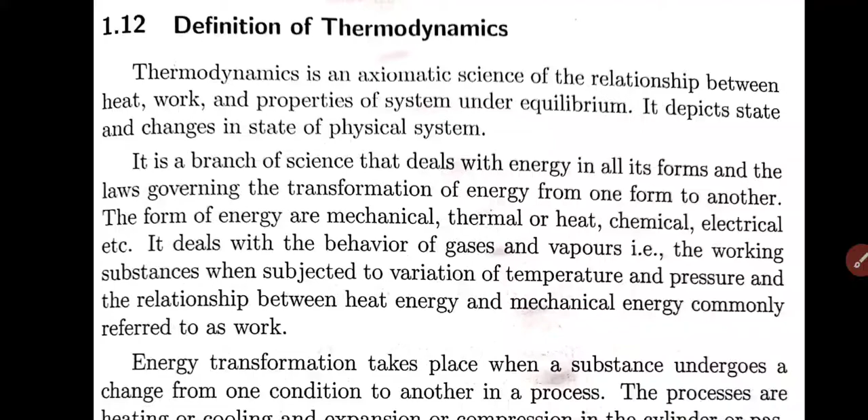Hello students. Now we shall look at thermodynamics. Basically it's a science of relationship between heat and work.

We use vehicles for transport like small scooty, bike, car, truck, train, aeroplane. We use power generated by thermal power plants, nuclear power plants. We use gas turbines for power generation. We use air conditioning system. We use refrigeration systems. In all these systems, there is interaction between heat and work.

Like in transport vehicles, we use liquid fuel, like petrol and diesel, which is burnt, and then the heat energy is converted into work. Similarly, in the case of refrigeration and air conditioning, we use electricity to run a motor, and that transfers the heat. So either heat is converted to work or work is converted to heat. These systems, when we discuss, we want to discuss the performance of the systems also.

You are all aware that whatever oil, gas, coal we have got in the earth crust is very finite in nature. It is fast depleting, and it is told that another 40-50 years oil will not be there, another 100 years coal will not be there. So what is the source of energy for the future generations? One thing. Second aspect is the environmental pollution.

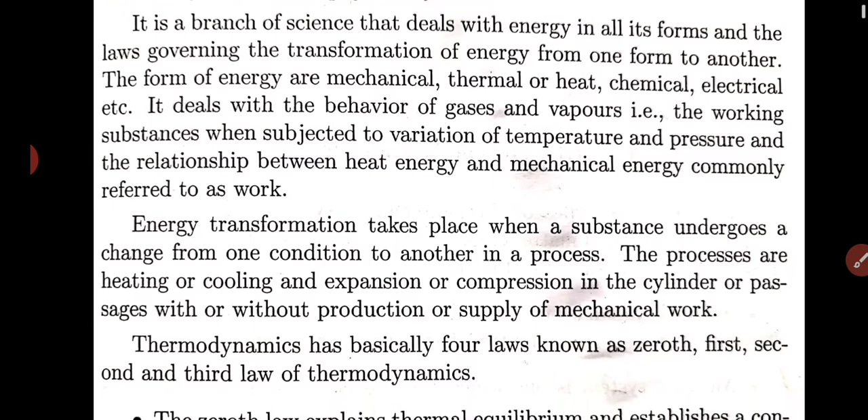So it deals with all kinds of energy like mechanical, thermal, heat, chemical, electrical, etc. And it also deals with the behavior of gases and vapors, especially in a steam power plant. In a steam power plant, you are using steam. Like your Kaiga nuclear power plant. What happens there? Nuclear reaction is there. Heat is produced. That heat is carried away by heavy water.

Then that transfers it to the normal water. Normal water gets converted into steam, superheated steam. That is expanded in a turbine, which is coupled to a generator, and electricity is produced. So we have to study how this steam is changing phases. These all relationships we will study in thermodynamics. And this mechanical energy component we call it as work, whether rotation of shaft or movement of object from one place to another place.

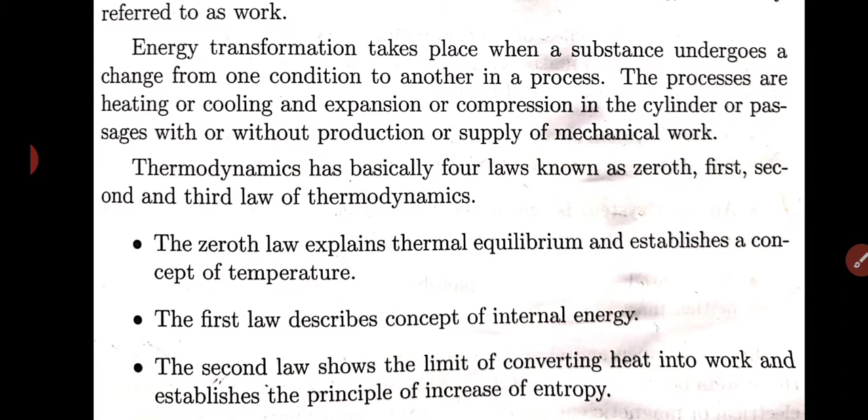So thermodynamics has basically 4 laws: first law, second law, and third law. And they found out one more law, but that law is the basic law, which talks about temperature. So they called it as zeroth law. The zeroth law explains thermal equilibrium and established the concept of temperature. Because of zeroth law, we have come out with the concept of temperature.

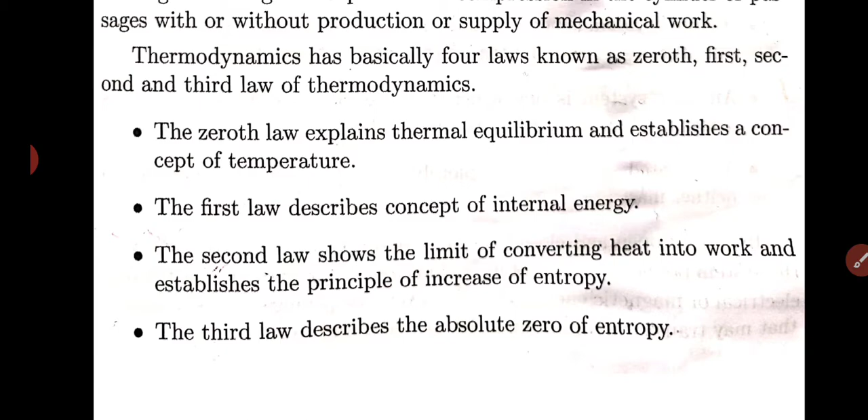Thermodynamics is a 300 years back story. So please try to understand. That time they defined the concept of temperature. As of today, you are aware because they use an IR gun to take the temperature. But just imagine those years. So first they had to define the concept of temperature.

Then the first law of thermodynamics, you know that energy can neither be created nor destroyed. So this gives the concept of internal energy. And the second law shows the limit of converting heat to work and work to heat also, and thus it establishes the principle of increase in entropy. So this law talks about entropy.

So whatever heat we supply to the bike engine, suppose 1 liter of petrol is burnt, only 1/3 is used for power generation, 2/3 goes as cooling heat or exhaust heat. So it is not that 100% of the heat energy supplied to the engine gets converted into work. Only 30 to 40% gets converted, but the rest 60% is lost in the form of heat, engine cooling water or cooling air.

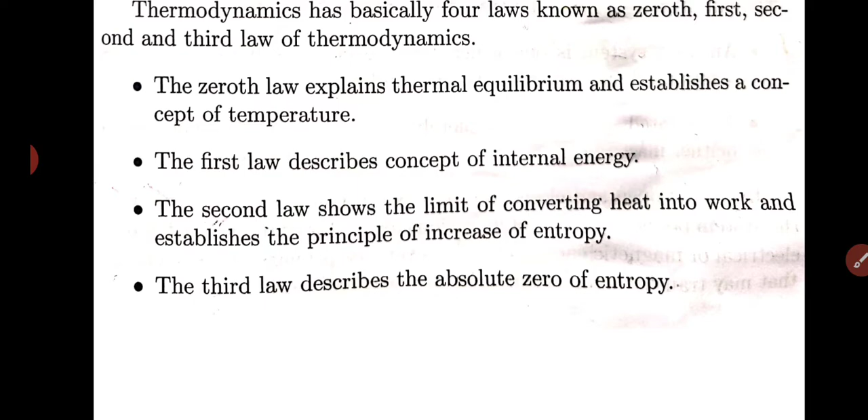And the third law describes the absolute zero. You should know what is the lowest temperature we can reach. The lowest temperature we can reach is minus 273 degrees centigrade, also known as 0 Kelvin. At that temperature the entropy, the disorderliness in any system, is 0. So these are the 4 laws.

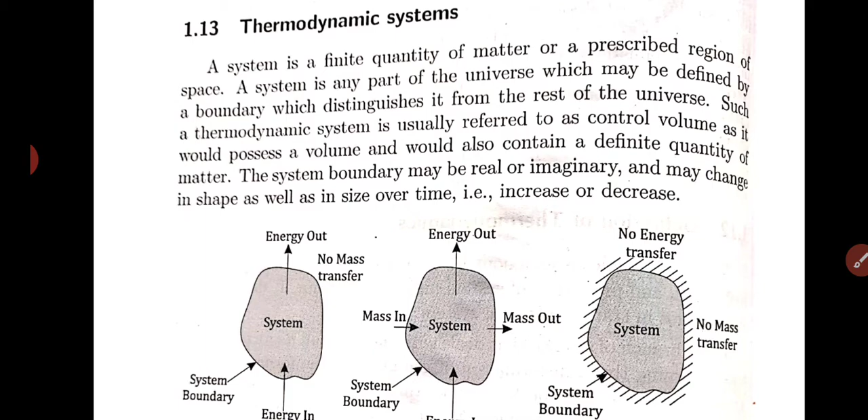Now, to study thermodynamics, we first have to study a system. What is a system? Take any system, like your bike engine. If I take a bike engine, what happens in it? I am supplying petrol, I am supplying air, and the exhaust gases are going out of the engine, right? And the engine is also doing work.

The engine is taking heat energy inside and throwing out heat energy as well as doing work, and there is a heat interaction between the engine and the surroundings. So if I take the engine as a system, you can see energy is coming in and energy is going out. And there is a system boundary like the cylinder wall. If I take that as the system boundary, then that becomes the boundary.

So there is transfer of energy inside and outside, and there is transfer of mass inside and outside, that is, fuel coming in and exhaust going out. So this becomes an open system. In an open system, energy, that is heat and work, and mass, like fuel and exhaust gases, go in and out. So this is known as the open system.

Now take another system, like your pressure cooker, where you have put some rice for boiling. What happens here? You are supplying heat energy to the pressure cooker, and some heat is going out through radiation from the pressure cooker because it is at high temperature. Any body above 0 Kelvin will always radiate. So it is emitting radiation; energy is going out in the form of heat.

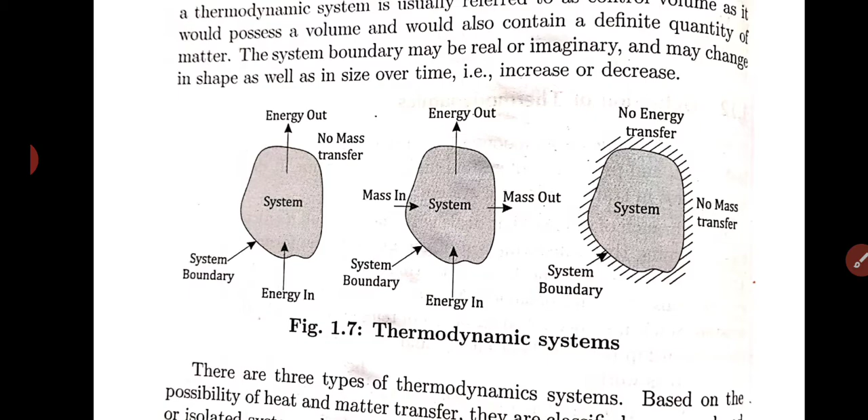Like the pressure cooker. And the last is the isolated system, where neither heat exchange nor mass transfer is allowed between the system and surroundings. So here the only differentiating factor is mass. You should remember: mass transfer is not allowed.

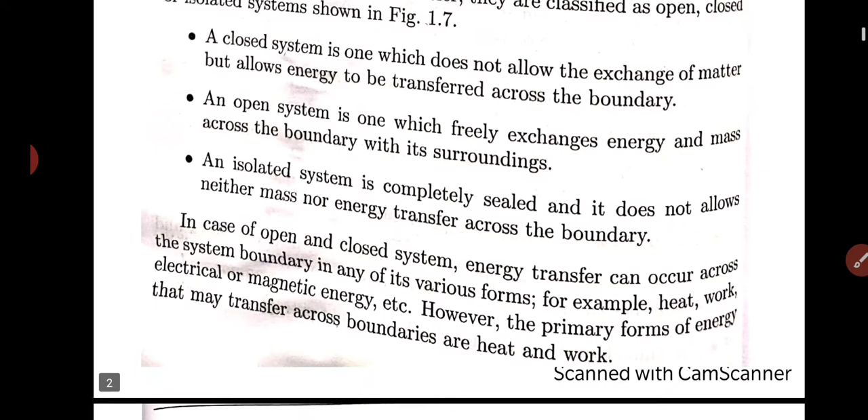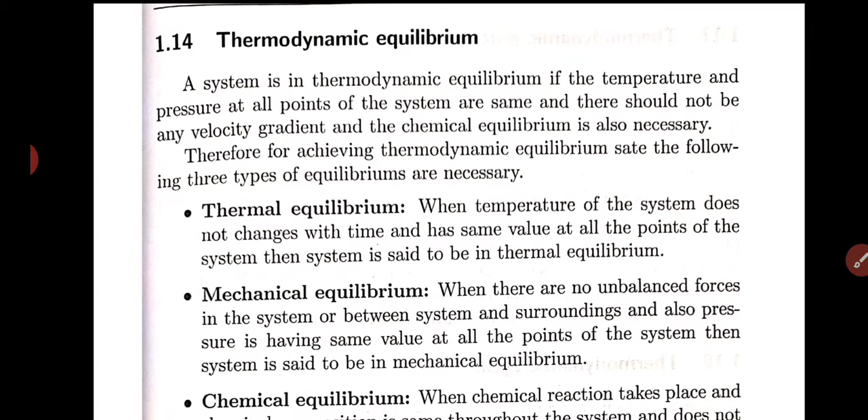Now let us come to a concept called thermodynamic equilibrium. There is something called equilibrium, and there are different types: thermal equilibrium, mechanical equilibrium, chemical equilibrium, and lastly thermodynamic equilibrium.

You have seen the seesaw children play on, sitting on either side. When they start, it oscillates, then after some time it comes to a standstill. That means there are no unbalanced forces between the system and surroundings, and this we call mechanical equilibrium. So mechanical equilibrium means there are no unbalanced forces between the system and the surroundings.

Now let's come to thermal equilibrium. I take a hot cup of coffee, keep it on my table, leave it there for about 1 hour, and then come back. What happens? The hot coffee I had kept at maybe 70-80 degrees centigrade will be at room temperature, say 35 degrees centigrade, after 1 hour. So what has happened? Whatever heat was in the coffee has been exchanged with the ambient air and it cooled down.

So now they are in thermal equilibrium. That is, the temperature of the system does not change with time, and has the same value at all points. It needs to be in thermal equilibrium. Initially it was not in thermal equilibrium. When I kept the hot coffee, the coffee was hot and the ambient condition was 35 only. But over a period of time, the coffee has become 35 and the ambient air temperature has become 35. So now both of them are 35. So the temperature is same, it does not change, and now the system and the surrounding are said to be in thermal equilibrium.

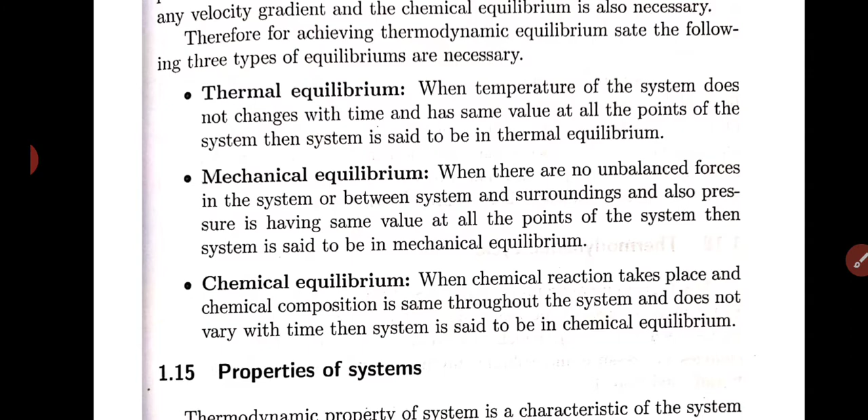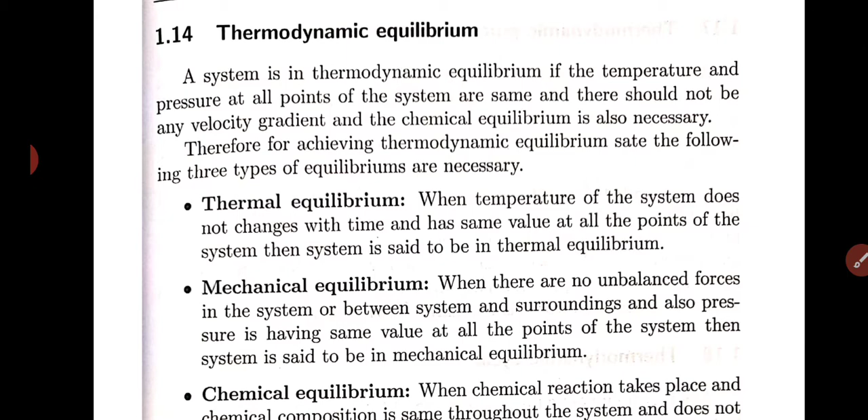Okay, now comes chemical equilibrium. In chemical equilibrium, initially there may be some chemical reactions, but after some time no chemical reaction takes place and the chemical composition is same throughout. Then I will call it chemical equilibrium. Now what is thermodynamic equilibrium? When a system and surroundings are in thermal equilibrium, mechanical equilibrium as well as chemical equilibrium, then we say that the system and the surroundings are in thermodynamic equilibrium. Okay.

Now we will discuss the properties of the system. What are the properties? Volume is a property, mass is a property, temperature is a property, density is a property. We define the system by these properties. So a property of a system is a characteristic of a system which depends on its state, but not upon how the state is reached. The property of a system depends upon the state.

Now I am talking about a hot cup of coffee. It is hot at some 80 degrees centigrade. So how am I going to define it? 100 ml of coffee is there at 80 degrees centigrade, so I am defining the volume. I am defining it by mass also: 100 grams of coffee at 80 degrees centigrade. So these are the properties of the system, if I take a cup of coffee as a system. Now there are two types of properties: one is the intensive property and second is the extensive property.

Please understand, an intensive property is any property that does not depend on the mass of the system. Suppose I take that cup of coffee and I share it with my friend, I make it half. So what happens? Does the temperature change? No, both are at the same temperature. Does the pressure of the coffee change? No, they are at same pressure. Does the density change? No, the same density is there. So temperature, pressure and density we call intensive properties.

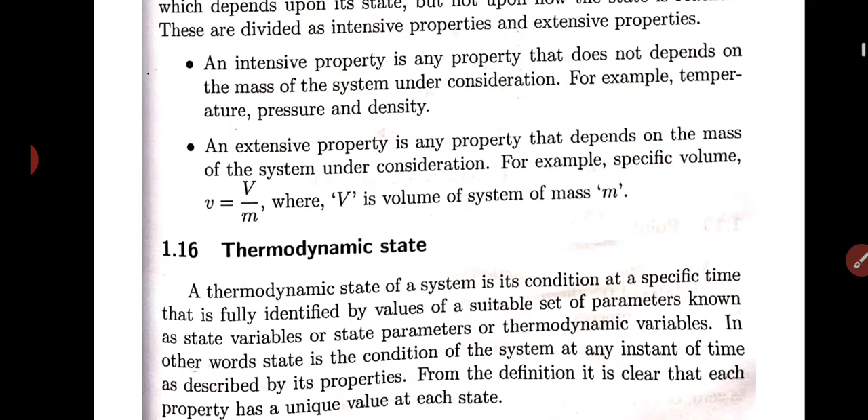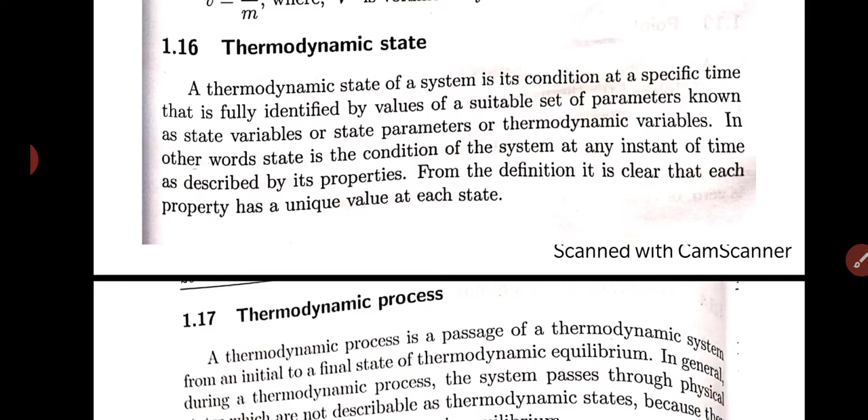Okay. Now let's define thermodynamic state. A thermodynamic state of a system is its condition at a specific time that is fully identified by the values of a suitable set of parameters known as state variables, or thermodynamic variables. When we have to define the state, we define it with specific variables like temperature, volume, pressure. In other words, state is the condition of the system at any instant of time described by its properties.

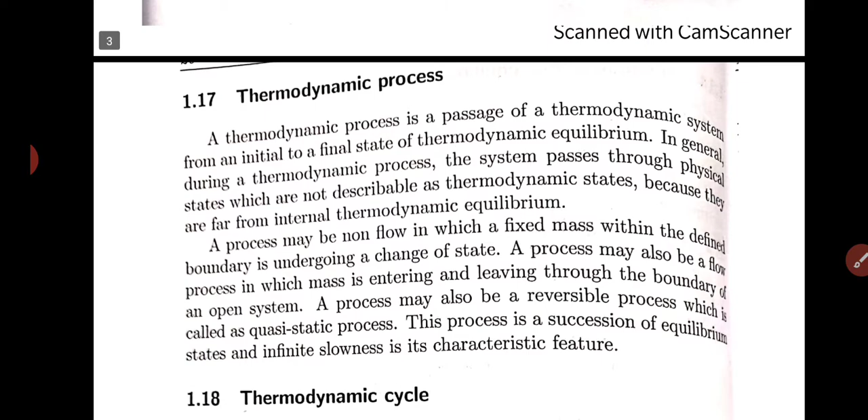Now let us discuss the various thermodynamic processes. A thermodynamic process is a passage of a thermodynamic system from an initial state to a final state of thermodynamic equilibrium. Suppose I want to drink a cup of coffee. I have taken cold water and heated it to around 100 degrees centigrade, then added coffee and sugar. Initially the water was at 35 degrees centigrade, I heated it to 100 degrees centigrade, and then it comes to equilibrium. So this is the process of heating. So the system has passed through a physical state.

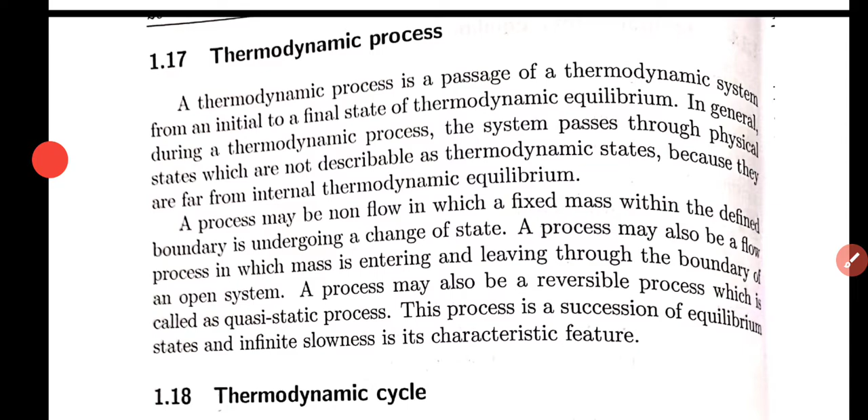Now let us discuss cycle. You know, in a bicycle, what happens? You crank the initial pedal. The pedal goes down, again comes up, goes down, again comes up. So that is a cycle. Any thermodynamic process or series of processes whose end states are identical is termed a thermodynamic cycle. So if the end state is the same, then it is called a thermodynamic cycle or a cyclic process.

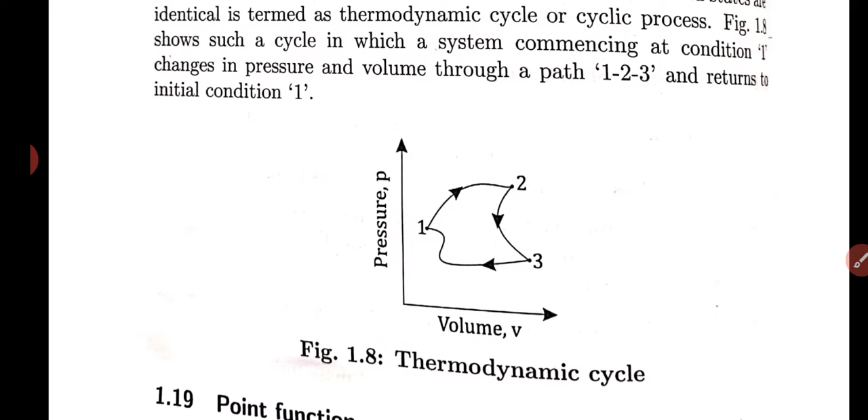Now you can see here there is a change in pressure and volume. Suppose the item is at state 1. The pressure is P1, volume is V1. Now we have expanded it, volume becomes V2, pressure becomes P2. Then it comes to state 3, P3, V3. And finally it goes back to state 1, that is P1, V1. So what happened? The beginning state as well as the end state is the same. Then it is known as a cycle.

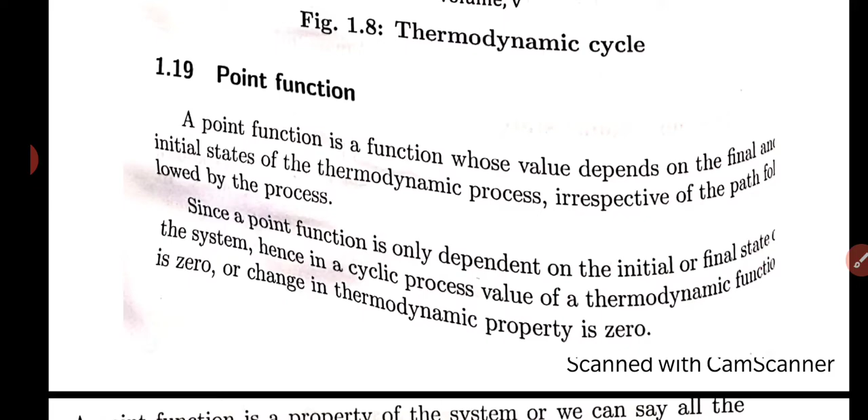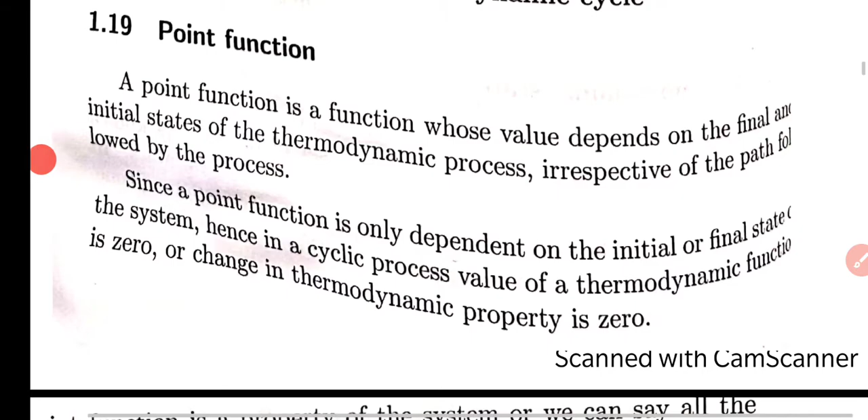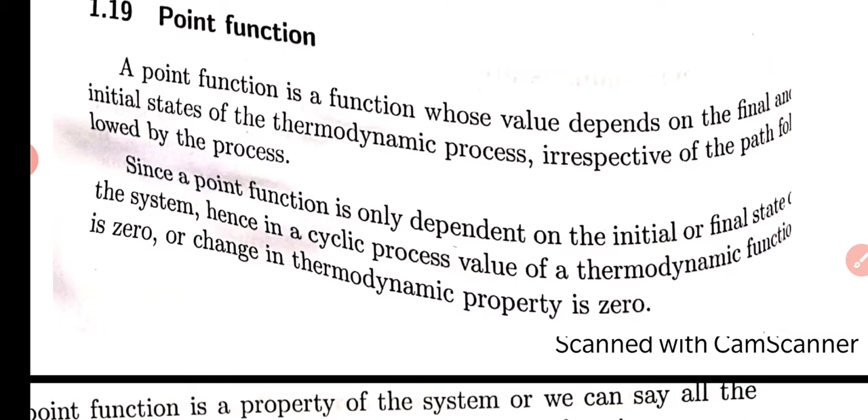Okay, let us now discuss point function and path function. What is a point function? Please understand this concept very clearly. A point function is one whose values depend on the final or initial states of the thermodynamic process, irrespective of the path taken by the process. So, since a point function is only dependent on the initial and final state of the system, in a cyclic process the change of a thermodynamic property is 0. So a point function depends only on the end points and not on the path.

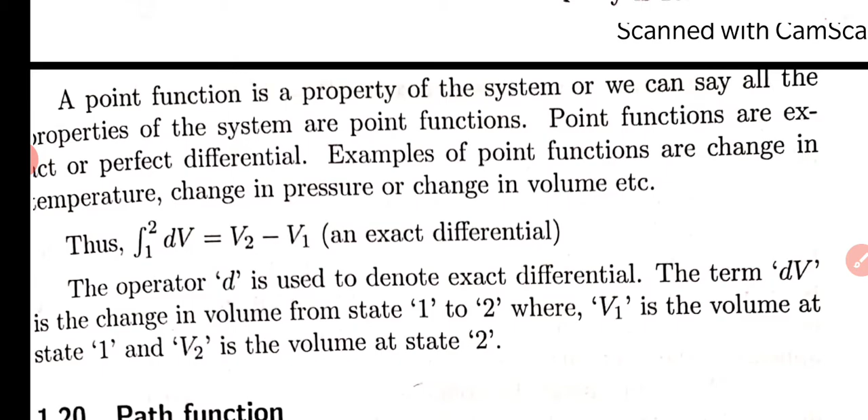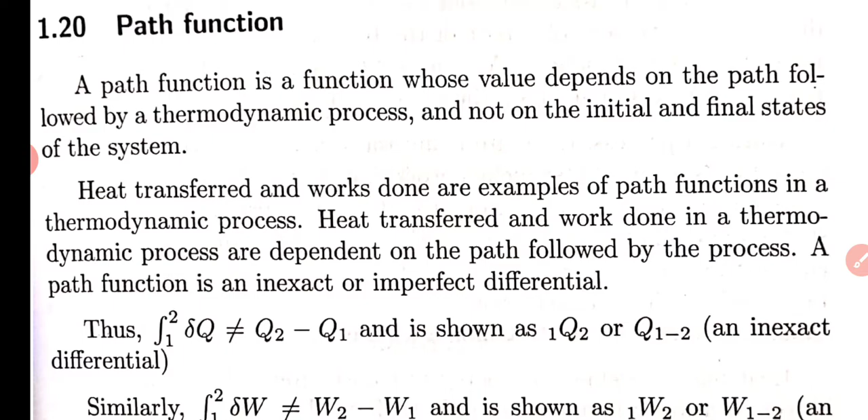Whereas a path function is a function whose value depends on the path followed by the thermodynamic process and not on the initial and final states. As an example, heat and work done, which we will be discussing in a thermodynamic process, are both path functions. Because it comes from the pressure-volume diagram, we cannot say that this much heat has been transferred or this much work has been transferred just by looking at points 1 and 2.

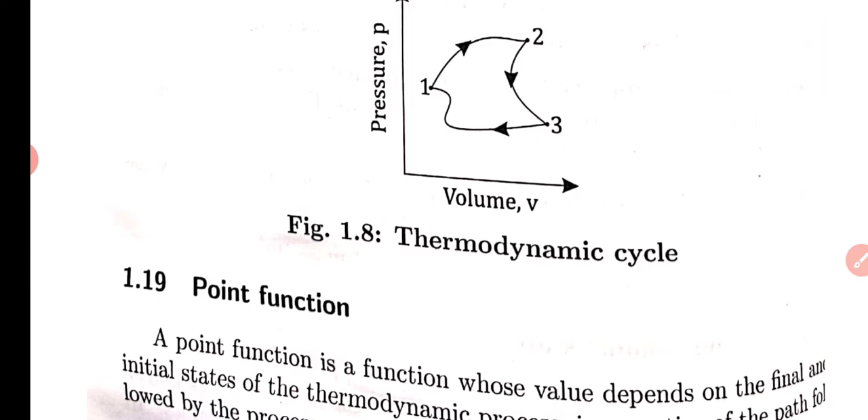Now you can see this PV diagram here, with 3 states: state 1, state 2, state 3. State 1 has P1, V1 conditions, state 2 has P2, V2 conditions, state 3 has P3, V3. So in the case of work and heat, I cannot say that P2V2 minus P1V1 is the work done. No. That does not depend on the end states. It depends on the path.

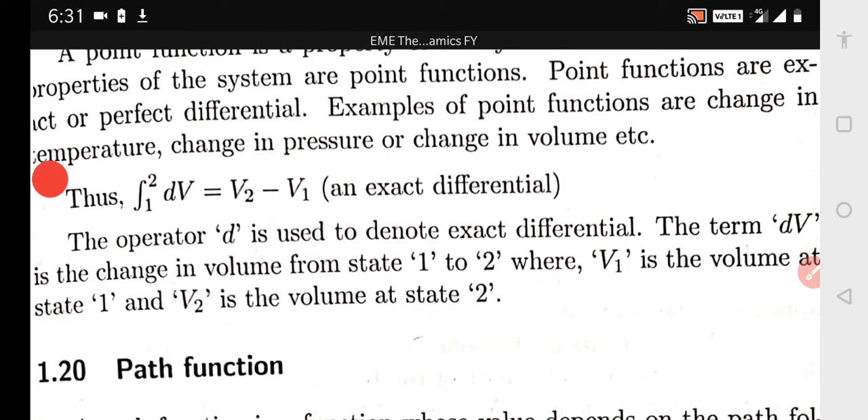A point function is a property of the system, and we can say that all the properties of a system are point functions. As I said, temperature is a property, pressure is a property, volume is a property. Now suppose I want the change of volume. The integral from 1 to 2 of dV is equal to V2 minus V1. It is an exact differential. To find the change in volume between V2 and V1, I integrate dV from 1 to 2; the small d denotes the exact differential.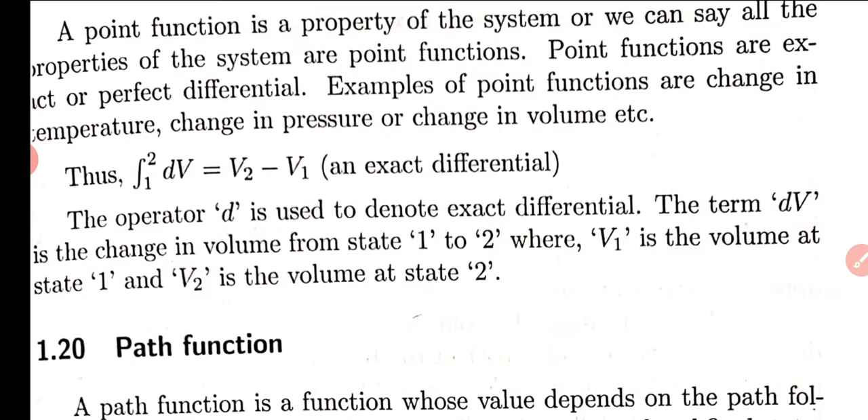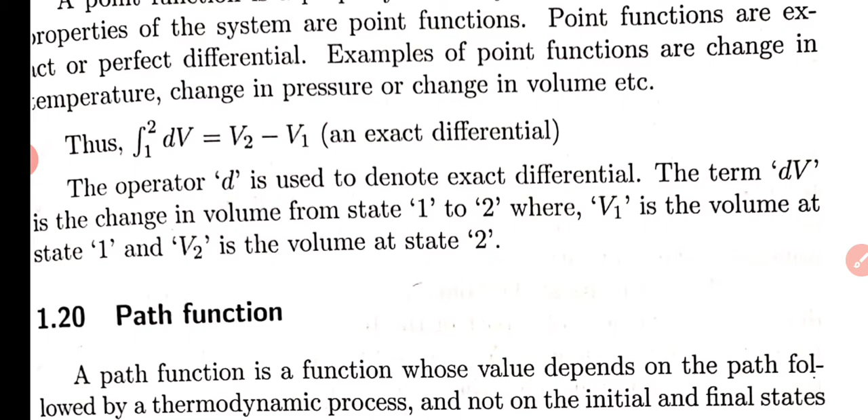If I write δ, then it becomes an inexact differential. If I write small d, then it is an exact differential, and dV is a small change of volume from state 1 to state 2, V1 is the volume at state 1 and V2 is the volume at state 2. This is about point function. Now coming back to path function, we are discussing heat and work.

Regarding heat, suppose we denote heat by capital Q and work by capital W. I cannot say the heat transferred, the integral from 1 to 2 of δQ, is equal to Q2 minus Q1. I cannot write it like this. I have to write it as Q from 1 to 2, or Q1-2. This is an inexact differential.

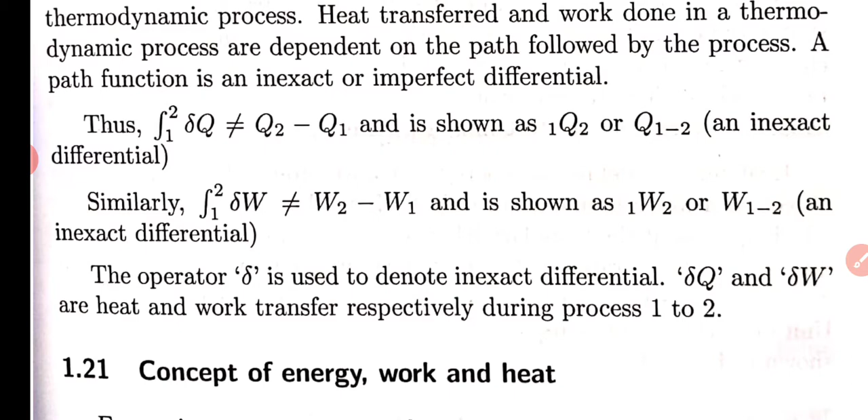Similarly, for work, I cannot say the integral from 1 to 2 of δW is equal to W2 minus W1. No, I will write it as work done from 1 to 2, or W1-2. This is an inexact differential. The operator δ is used to denote an inexact differential. δQ and δW are heat and work transfer respectively during the process 1 to 2.

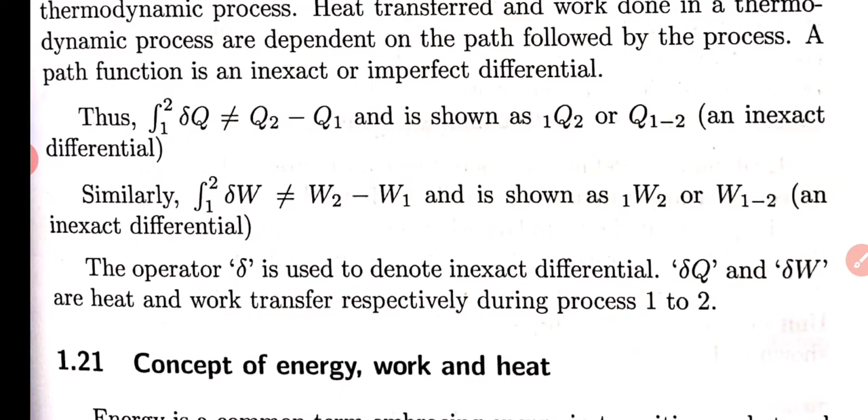Now in the process 1 to 2, there is a transfer of heat and there is work done also. So we cannot write this difference as Q2 minus Q1 or W2 minus W1. We have to write Q1-2 or W1-2.